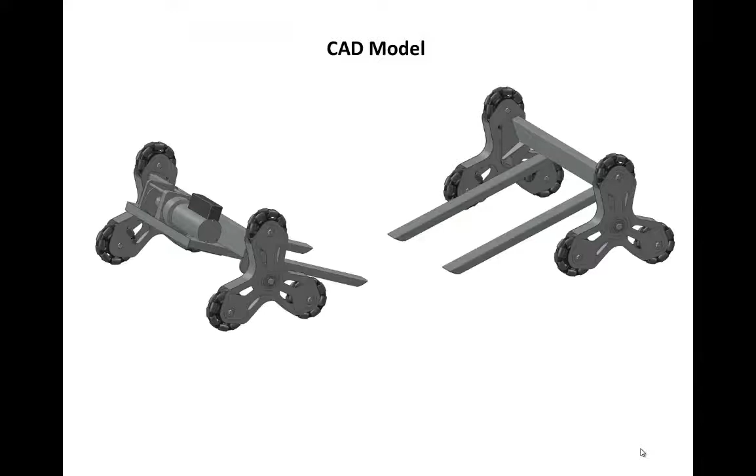Here's a CAD model showing the two halves of the piano dolly. An electric winch is mounted to one side, which provides the muscle for moving the piano upstairs, as you will see in a moment. You will notice that each consists of two forks to support the weight of the piano, as well as two hubs.

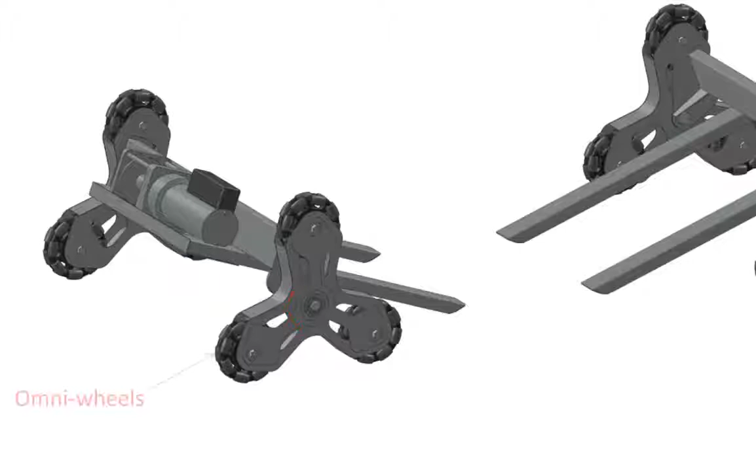The hubs rotate about their centers, which enables the dolly to climb stairs smoothly. Each hub has 3 omni wheels. An omni wheel not only rotates in this direction, which allows the dolly to move forward and backward, but it also contains small rollers around the perimeter that rotate in this direction, which allow the dolly to move side to side.

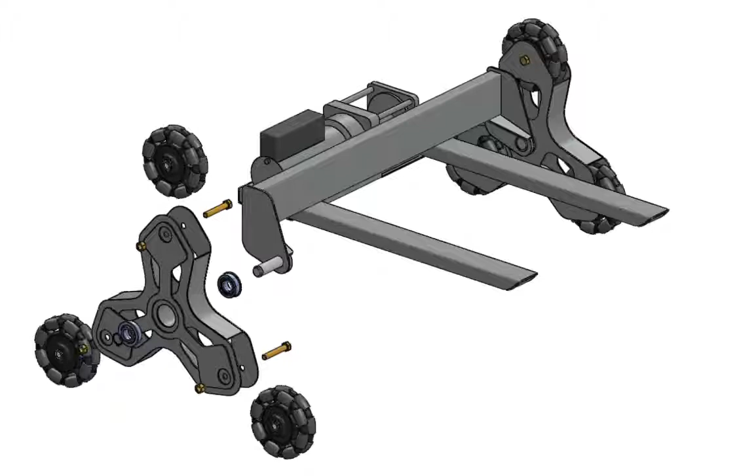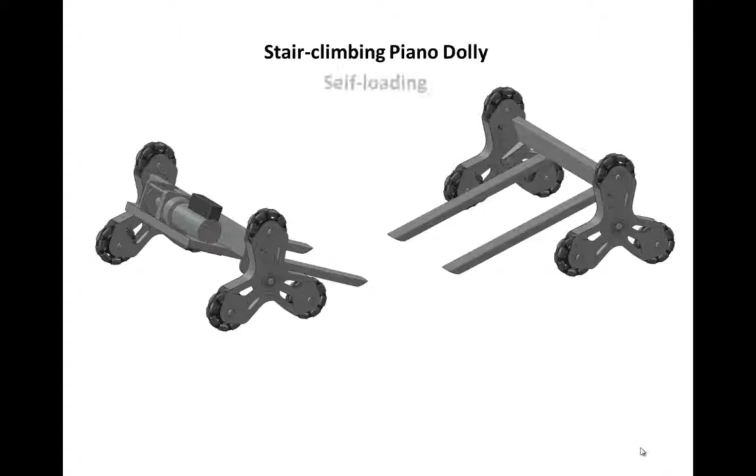This stair-climbing piano dolly is also self-loading. It's designed to work with upright pianos that can weigh up to 800 pounds. Here is a simulation that will demonstrate the self-loading feature of the dolly.

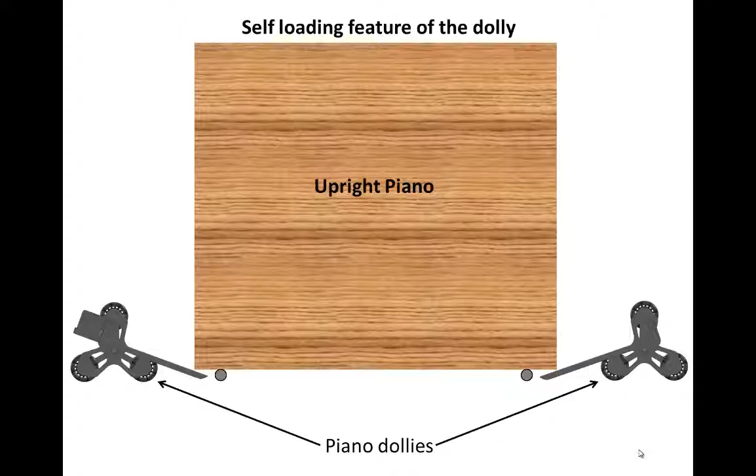Imagine that this is an upright piano. The two halves of the dolly are placed at opposite ends of the piano like this. One side has an electric winch. The cable from this winch is drawn out and connected to the opposite side.

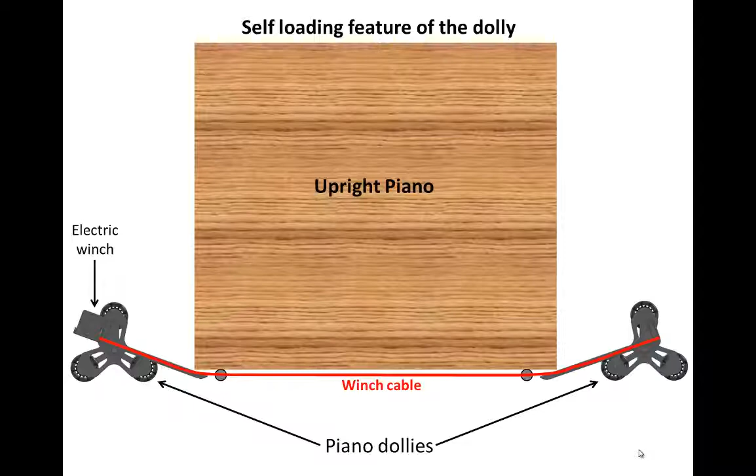When the winch is turned on, the cable is drawn inward, causing the dollies to move toward the center. As they move, the piano is lifted by the forks of the dolly. When the bottom corners of the piano are directly over the pivot point of the hub, the forks are forced to snap into a horizontal position. The piano is held between these corners of the dolly, beyond the pivot points, so that the piano's own weight holds the forks horizontally.

Tie-down straps are then placed to keep the piano and the dollies connected to each other.